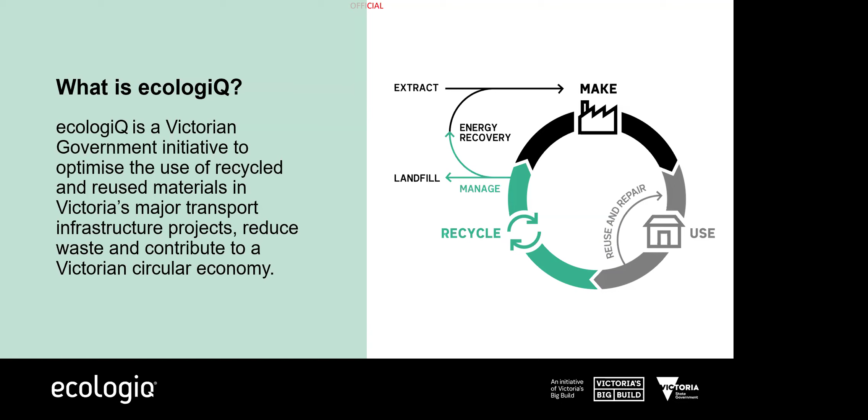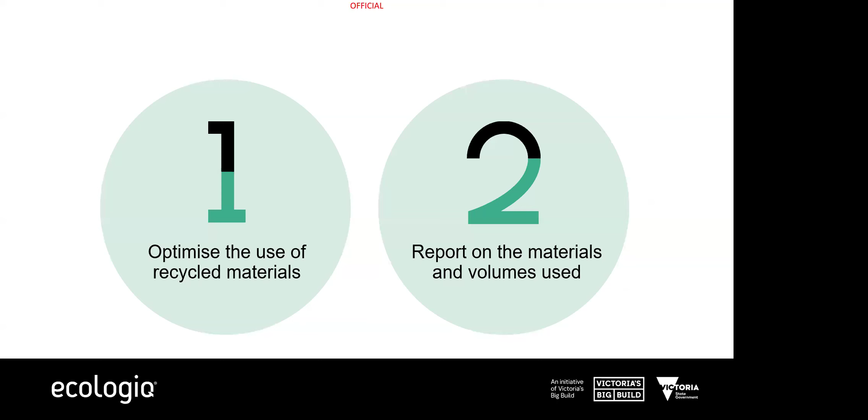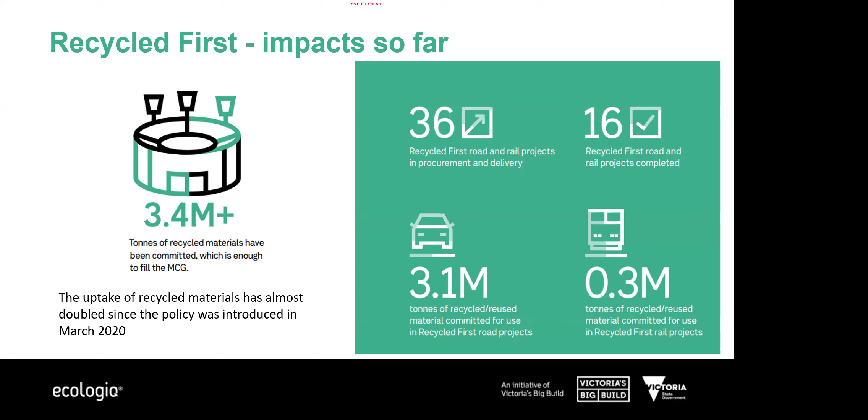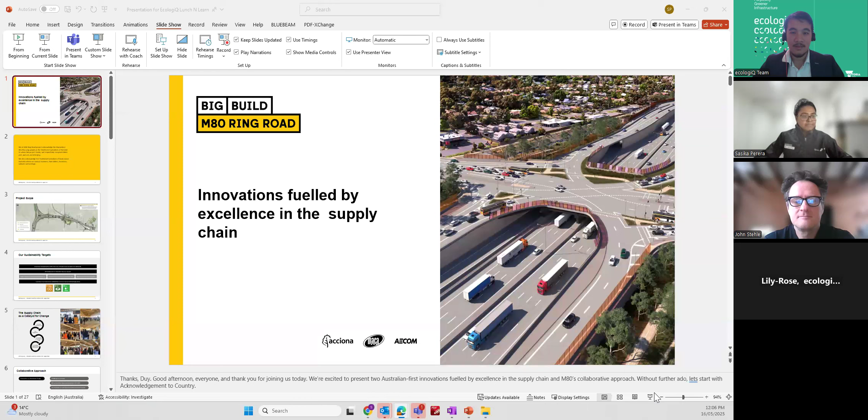I'll start sharing my screen. Hope you all can see my screen. Not yet, not yet. There we go. Can you see the big screen? Yep, it's in presentation mode. We're awesome, good to go.

Great, thank you so much Joey for the introduction, and good afternoon all, welcome. Thanks for joining with us today. We are excited to present two Australian-first innovations, fueled by excellence in the supply chain and the M80's collaborative approach. Without further ado, let's start with the acknowledgement of country. We at M80 Ring Road project acknowledge the Wurundjeri Woi Wurrung people as the traditional custodians of the land on which the project stands, and respectfully recognize elders past, present and emerging. We also acknowledge the traditional custodians of the lands across Australia where we conduct business, and their elders, ancestors, cultures and heritage. The M80 Ring Road Alliance, consisting of Acciona, Maca, and AECOM, is delivering the northern component of the North East Link program.

I would like to share a very brief overview of our project scope. If you want to know more about our project, I would recommend looking at our website.

We will complete the NEL connection between the M80 to the tunnel section up to Richard Avenue. We will add new lanes and introduce 2 new interchanges: one M80 interchange in Greensborough, and another at Grimshaw Street in Watsonia North.

We will deliver 10 kilometers of new and upgraded walking and cycling paths, promoting active transportation. We'll also have 8 new and upgraded bridges, including 2 landscape bridges at Elder Street and Watsonia Road.

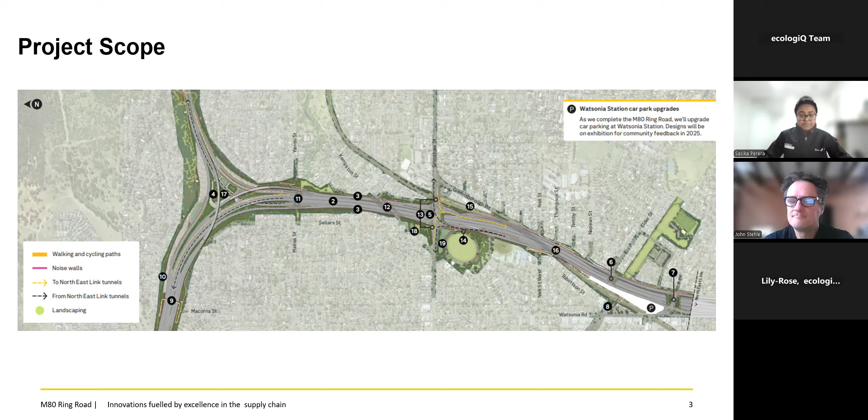At M80, we are all about creating a fundamental shift in how sustainable infrastructure projects are delivered. Our approach centers on 3 key focus areas to reduce the material life cycle impact.

One is design efficiencies and minimizing material usage. The second is maximizing recycled content and promoting the circular economy, as we just explained, and encouraging the use of sustainable certifications such as EPD and SSA to enhance the credibility of the products we are using.

The 2 products we're actually going to talk about today, Robovoid void formers used in retaining walls and GFRP bridge decks, are actively aligning with the United Nations Sustainable Development Goals, such as responsible consumption and production.

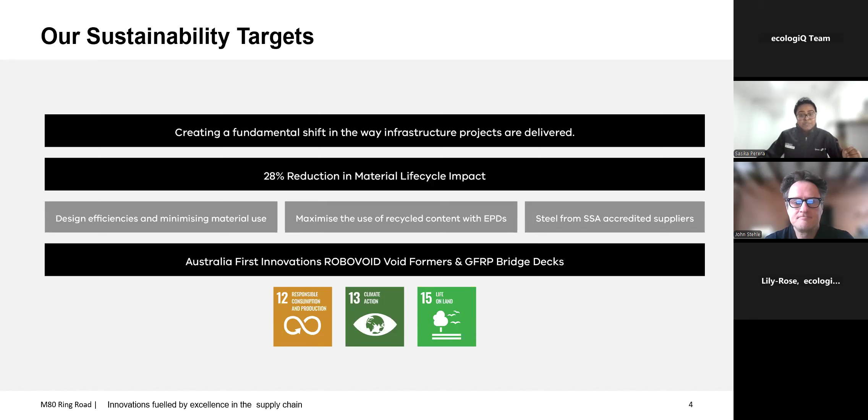So let's move towards what has actually helped us achieve these amazing outcomes: the supply chain. It's a very quick rundown of the process we've used that helped us incorporate these sustainability initiatives into our design.

Early on, we recognized the supply chain as a key catalyst for change in delivering sustainable infrastructure. So we spent a lot of time proactively communicating with the supply chain during the pre-bid, bid, and design phases, using opportunities like ICN events, ecologiQ supply showcases, and other industry forums to communicate our requirements to a wider network of suppliers.

In the photos here, you can see our team at a supply showcase organized by us, where our team was able to directly communicate with the supply chain to harness excellence in the supply chain.

This helped us have early engagement with our supply network, which was crucial for sustainability integration in design, to avoid design changes later in the project and optimize any sustainable solutions which could be incorporated into the design at that point.

Also, we had a strong focus on integrating sustainability into procurement, because our procurement team is the face of the project, directly engaging with our supply chain.

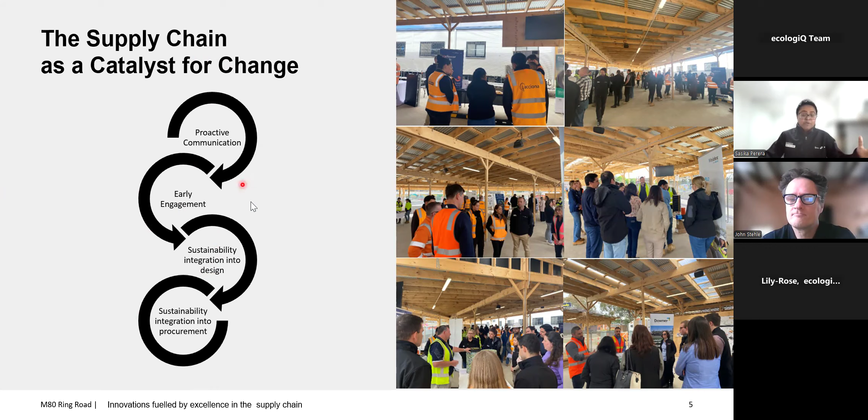All this process, the quick rundown I've given, has been fueled by a collaborative approach. I would like to give a huge shout out to our engineering, design, and procurement teams for championing this collaborative approach and delivering a greater outcome for the project.

So where possible, instead of going for standard prescriptive tenders, we have gone for non-prescriptive tenders, widely known as a performance-based tender approach, which gave us the opportunity to trial new products and processes in our project.

We always requested our supply chain to challenge our process and bring innovative ideas and products to the table. Our engineering team, which is deeply aligned with our sustainability requirements, has been constantly working with the supply chain to trial innovative products and provide guidance throughout the approval process.

Suppliers really got the benefit of working with a tier one company who is passionate and willing to collaborate. So instead of the standard or BAU engineering design approach, our engineering team actually took an eco engineering approach, working with suppliers to deliver great outcomes for the project.

We also acknowledge and recognize suppliers who have gone above and beyond, through various platforms. This is a great opportunity to highlight Robovoid, who has provided us with an innovative solution for our retaining walls.

So Robovoid, which is made of 100% Victorian recycled plastic. I would like to request Dr. John Stella to talk about the Robovoid.

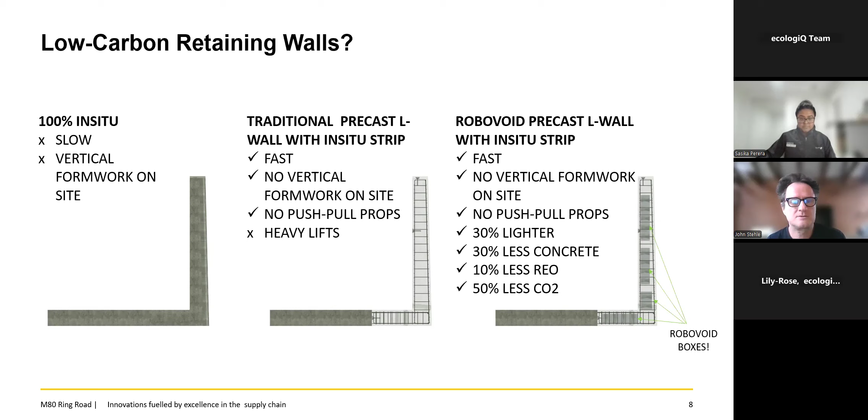So just to explain the Robovoid product, it's a 100% recycled plastic void former system, which is a bit like a kit of Lego, which clicks together and it creates boxes or void formers that go into concrete. We have a range of sizes of void former, and we can create voids from 50 millimeter up to 300 millimeter when they're joined together. And the width is currently 200 millimeters, and they click together side by side and you can create any size void former you want. So maybe move onto the next one.

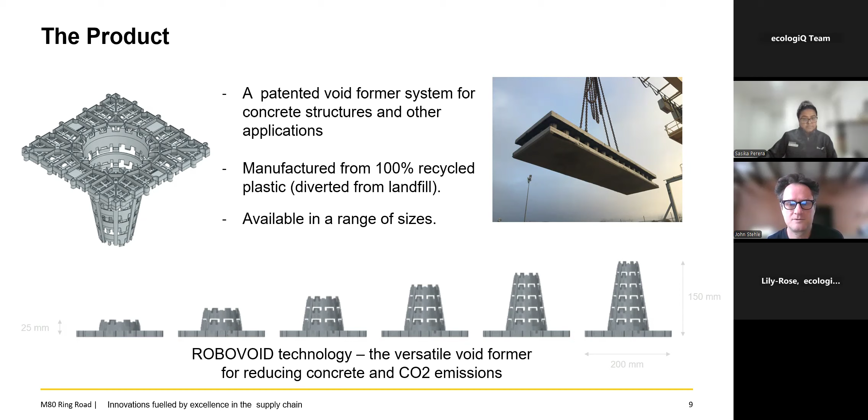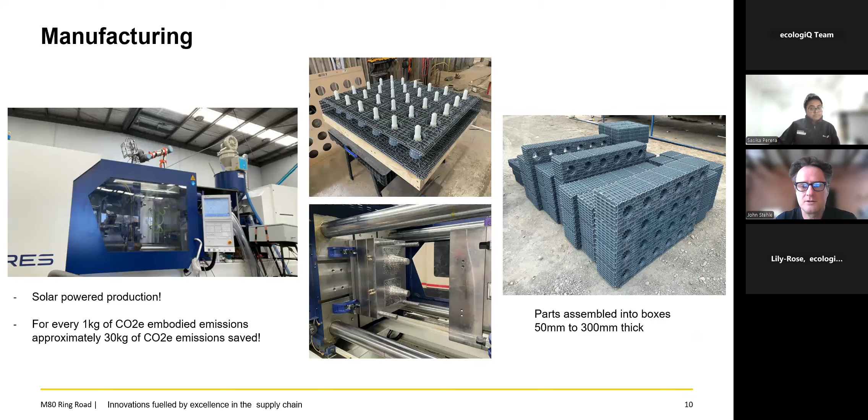So as I said, the concrete typically reduces by 30%. CO2 emissions substantially reduce, and there's logistics savings, fewer deliveries, lighter lifting, and less weight on a supporting structure.

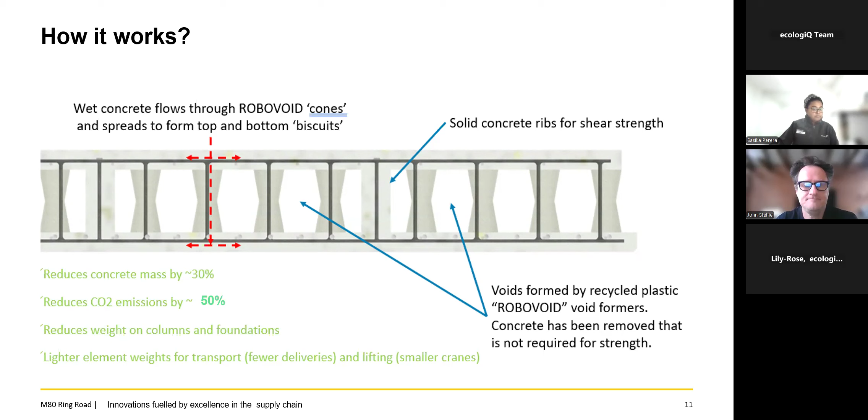Not so relevant for the retaining wall structure, but just more generally, this shows the versatility of the system and what else it can achieve. So strong connections, very little work on site, or most of the work's off site, so you get a very fast build process. You can move on to the next one.

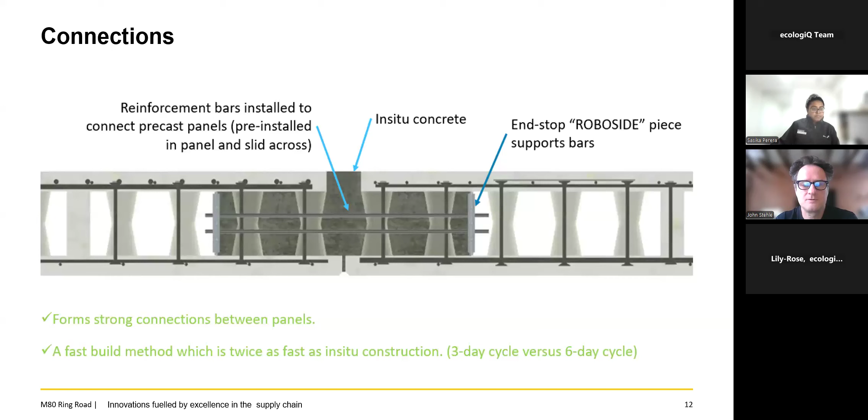So in the Northeast Link project, we've been heavily involved in developing the system or the application there, and we've looked at a wide range of retaining wall heights, some up to I think over 6 meters, and some as low as about 2 meters in height. So as part of that process, we do a lot of detailed engineering analysis. If you want to move on to the next step, Sasika.

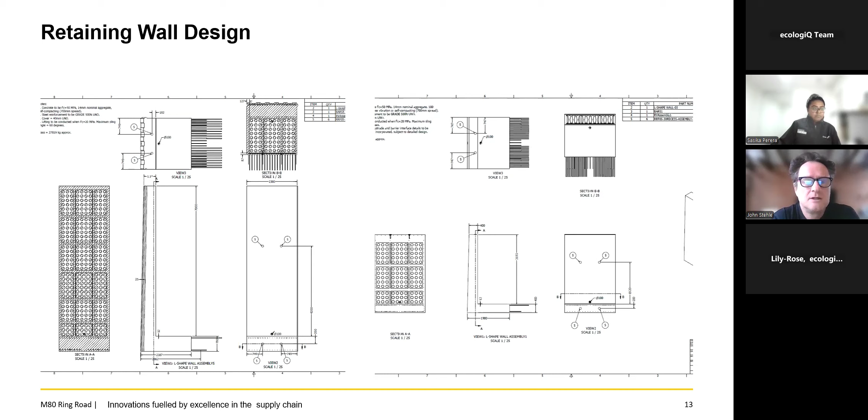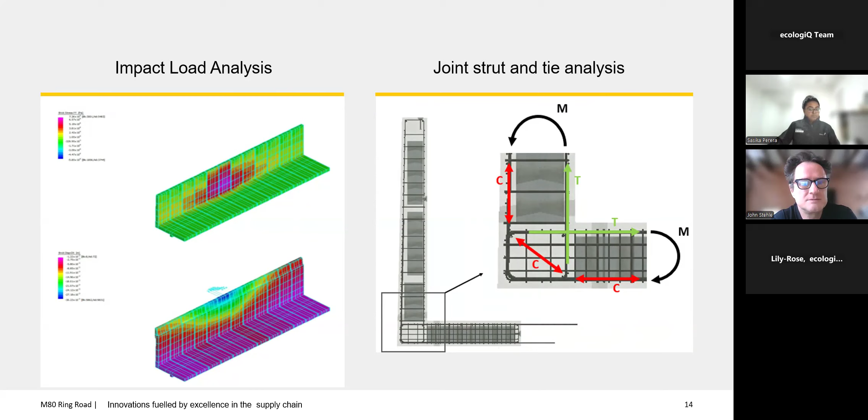Excellent. Yep. And analysing the retaining walls to demonstrate the performance requirements can be met. And so we have to get quite heavily involved in the details, because with any new product, there's a lot of scrutiny, and we really need to demonstrate the adequacy of performance in all aspects. So the left is a finite element analysis, looking at the impact loads, and on the right, just looking at the joints using strut and tie methods. There's a few examples of the analysis. Going to move on. Yep.

And so we've looked at a wide range of heights of retaining wall, and typically we find that the mass reductions are greater for the taller walls. If the wall's only 1 meter high, it's probably not worth putting the void formers in. In fact, they don't actually fit in because the wall's too thin. But for taller, thick walls, we can actually fit in bigger void formers and save nearly up to 40% of the concrete.

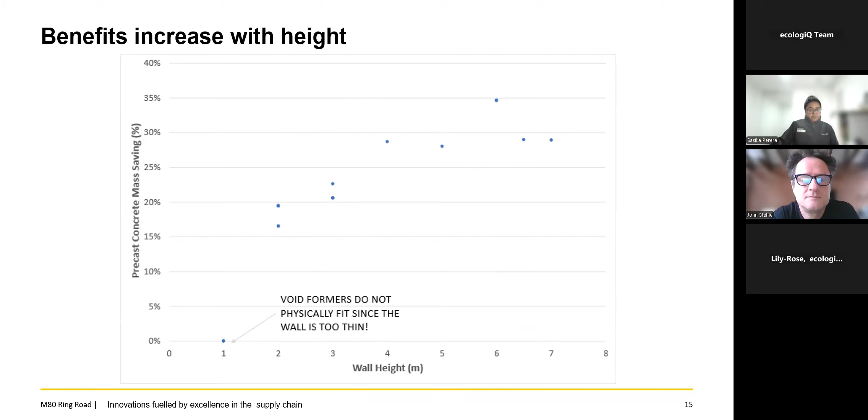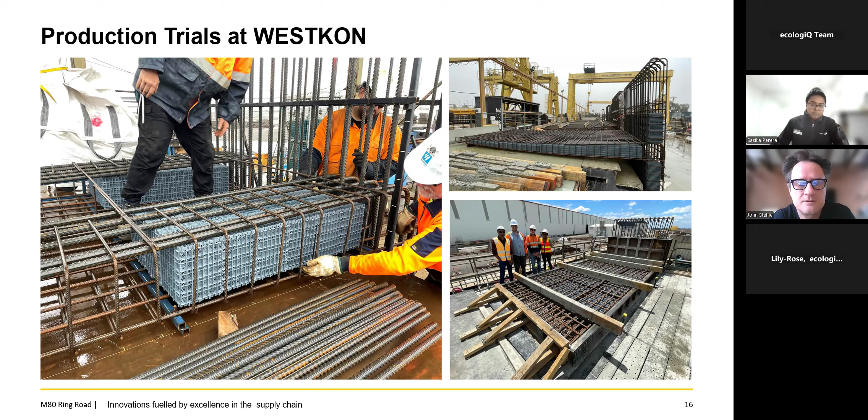So as part of the engagement process, we worked closely with WESTKON, and they kindly offered to conduct some production trials at their facility in Melton. And so we just wanted to make sure that the production manufacturing process would go smoothly. So some good learning there around the reinforcement detailing and the assembly sequence, and that's been incorporated into our design process going forward.

And a key part of the production trial was ensuring that we could get good consolidation of the concrete. So for this one, we used 180 slump concrete with 30% cement replacement and a vibrated mold, and excellent compaction was achieved there. And you can see some of the units that were produced, and they look a lot like all the other units that were made without the void formers, so you'd never know the difference. And Sasika and her colleagues were there to witness the trial, and just to make sure it was all going well.

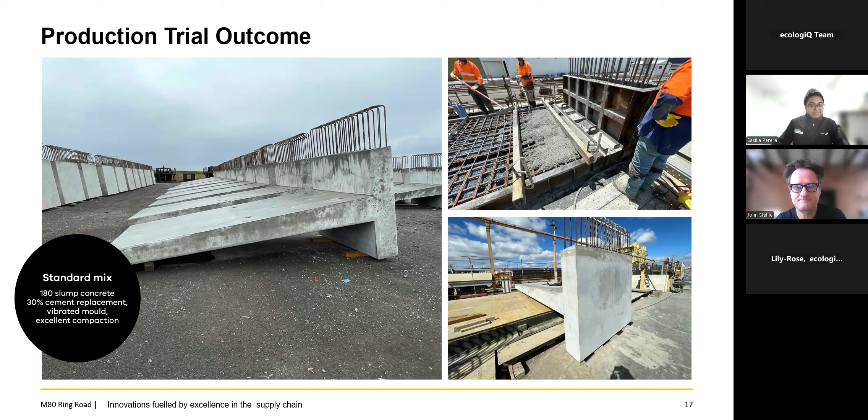So apart from void form retaining walls, it's a very versatile system. So you can use it in ground slabs, suspended slabs, even facades. So we've got some other projects coming up soon as well, where it'll be used in those applications, and we'll talk about them in the future. So thanks, Sasika. I'll hand it back to you.

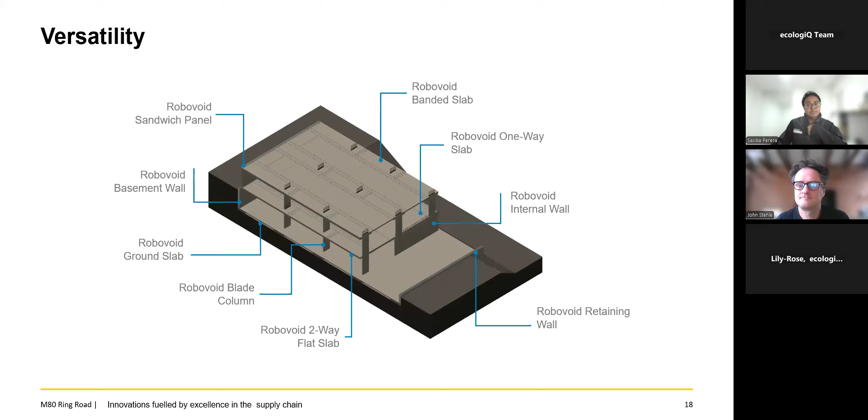Awesome. Thank you so much, John. This initiative has been really a learning curve for us, and the collaborative approach and the technical knowledge which has been given by Robovoid and John was extremely important and crucial for the success of this trial. And we still haven't installed this particular product on site. We are hoping to get this installation going from November this year. So we probably will be able to provide more information on the success of the actual constructability of the product after that first installation.

So let's move into the next part of this presentation, which is the glass fiber reinforced polymer composite bridge decks made with 100% recycled plastic PET foam core. And this has been designed and manufactured by SIS Sustainable Infrastructure System using their patent technology from their mother company in the Netherlands, InfraCore. Please note that the final stage of obtaining DTP approval for the use of this product in our project is still pending. And I would like to acknowledge and celebrate our engineering managers, Tim Lennon and Paddy Reid, for their effort in driving this extremely challenging initiative.

Also, I would like to acknowledge the collaboration of SIS, which was instrumental in driving this initiative forward. So we have Nick Bolton from SIS attending this session today. So if you have any questions, please feel free to put it into the chat. We'll get those answered through Nick and myself. So let's move in.

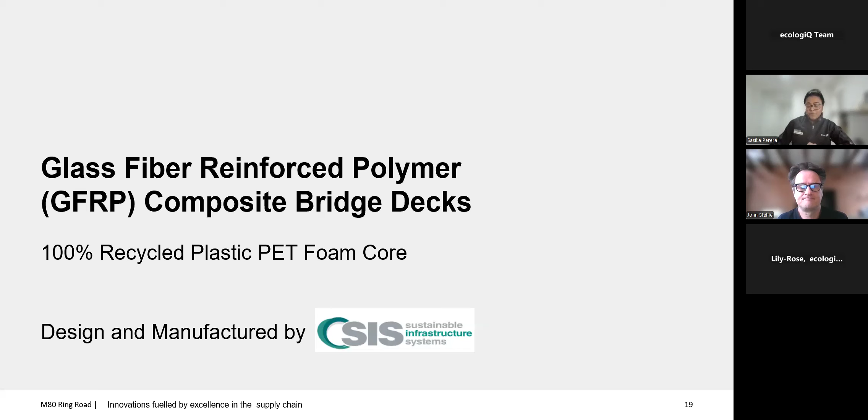So what are the benefits we can realize if we use the GFRP bridge deck? So it will provide the 100-year design life, which is important. The maintenance and inspection regime is comparable to the conventional decks, so nothing extra is required. Less whole of life costing due to the reduced capital and demolition cost and comparable maintenance cost. And using 100% recycled Australian soft plastic for the core, which is 80% of the deck, which is something we really wanted to be realized, and then 100% end of life recyclability.

Another important thing to notice of this bridge deck is it is 10 times lighter weight compared to the concrete deck and provides high strength, resulting in the reduction in the size of the structural components. So we can actually optimize the substructure and the rest of the superstructure, like the arches, because it is lightweight. And also it reduces the fuel consumption during the transportation and lifting equipment, because the weight is extremely low, and it can be manufactured off-site and reduces the on-site installation exposure, which is helpful in terms of the traffic disruptions and other construction programming constraints.

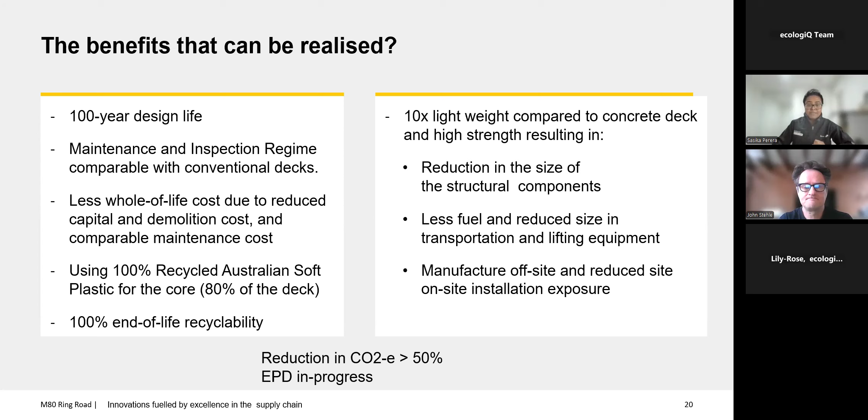The product. What is the product? So the product actually is the deck itself. I'm pretty sure that most of you have heard of the GFRP rebar. It is the bar, but this is actually a full deck made of the GFRP. So it has the wearing surface, which you can see on top, and then you have the GFRP structural flanges and webs, which are in a Z shape. So it's the red line in the middle photographs. And then the PET foam core, which is made of 100% recycled plastic.

So what is GFRP? GFRP is the composite material made of polymer matrix reinforced with glass fiber. So as I mentioned, SIS is using the InfraCore technology to manufacture this in Australia. The actual GFRP Z flanges have been made using the glass fiber sheets and locally sourced resin. And then the PET foam is made from 100% recycled Australian soft plastic.

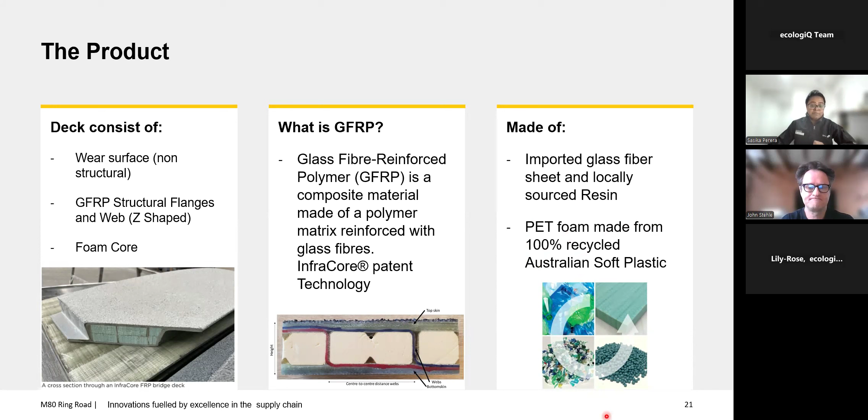So I would like to talk about the wearing surface and what benefits it can add to the urban design aspects of your project. It can have various colors and patterns. You can have various types of surfaces and high quality texture finishes, and it actually provides quite a lot of urban design flexibility.

For our project, what we have proposed is the multi-layer deck coating system. So we'll have a non-structural coating providing the UV resistance, and we will achieve a P5 slip rating in accordance with the Australian standard, and also this wearing surface will provide an easily maintainable surface during the life of the structure, which is very important.

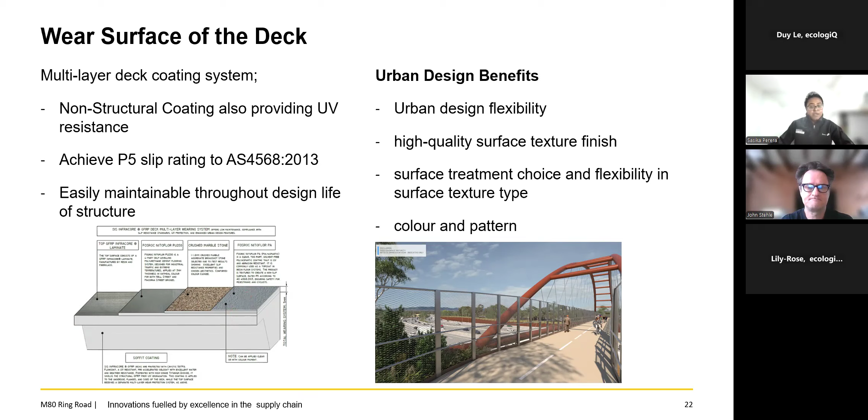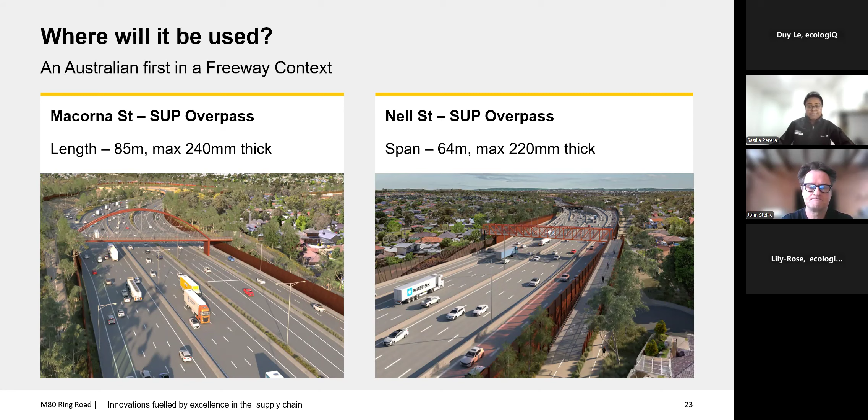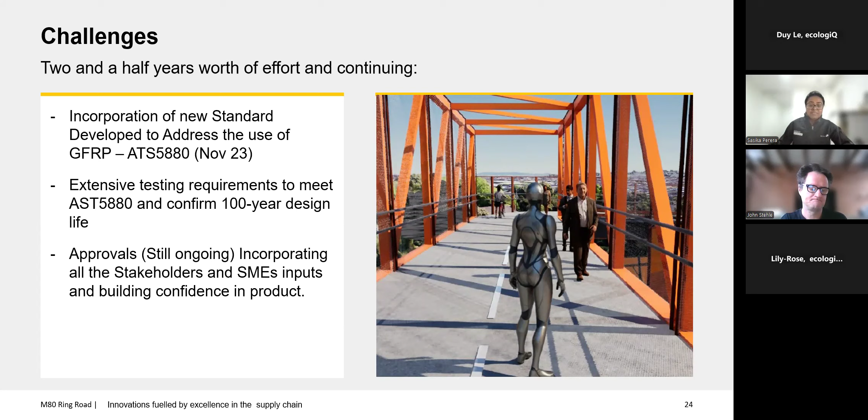The learnings, the collaboration, as I mentioned, has been extremely crucial. Open book approach with M80 engineering team and with SIS. That approach has been extremely instrumental, where SIS can get the guidance and support from our M80 engineering team to actually go ahead and proceed with the necessary requirements made by the SMEs. Early identification and engagement with the suppliers, as I mentioned, and then trying to get the necessary approval through the collaboration with the stakeholders and SMEs.

So another important learning was when we first met SIS, they were importing the core, the PET foam core, from overseas using, again, recycled plastic, but it is actually overseas waste. However, within these 2.5 years, SIS was able to develop a process where they can actually use Australian soft plastic to manufacture that PET foam for the core, which is 80% of the bridge deck. And they have the conversation going with Woolworths and REDcycle, so that they can actually use that particular product to manufacture the PET foam using Australian soft plastic.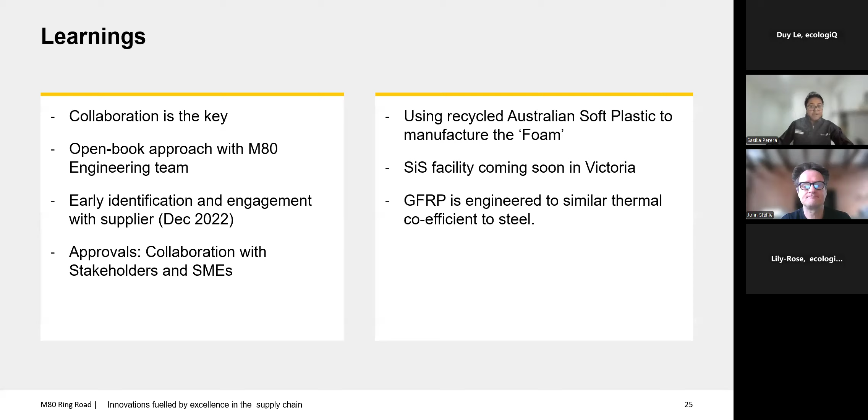I would like to hear from you guys what you would like to hear from us next. Because as a part of M80 Ring Road Completion, we have actually implemented various initiatives such as ultra-low warm mix asphalts, calcined clay field trial using excavated spoil in situ and precast, which is coming soon, low carbon concrete solutions for structural elements, up to 75% SCM, and then low carbon stormwater drainage solutions and temporary cardboard hoarding with acoustic properties. So please feel free to scan the QR code and provide your vote so that we know what you would like to hear from us next. Over to you, Duy.

Thank you, Sasika, and thank you, John. So I hope you're getting plenty of data there, because I'd love to find out more about all of those elements, and for our future Lunch and Learn sessions, I think it'd be great to revisit some of these topics. So my key takeaway from that is the importance of collaboration up front. I think what we're seeing here with the M80 project is that engagement with the supply chain, looking at what's possible, having your procurement processes not being prescriptive, but really being performance-based, allows for that innovation, which is something we're keen to see as well.

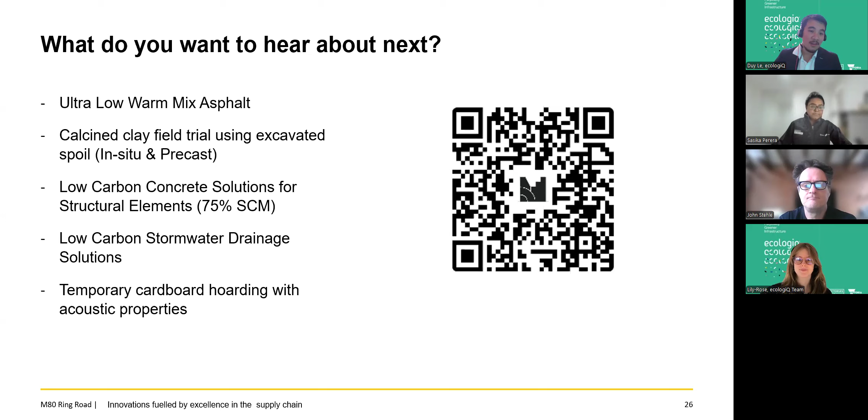So just going straight into the Q&A from an anonymous attendee. This might be a question for you, John, perhaps, or if you know the answer to this: are there any other recyclers that recycle GFRP in Victoria or elsewhere in Australia? Sorry, say that again. Are there any recyclers that recycle GFRP in Victoria or elsewhere in Australia? So as far as we are aware, SiS will take the material back, and we have Nick from SiS if you want to answer that question. Yeah, I'll see if Nick is on the line. Is this Nick Wotton? Yes. Nick, if you're there, you're welcome to take the mic.

Can everyone hear me? Yep. Excellent. So our product is fully recyclable. We're actually in talks, and have been for about a year and a half, with GE in relation to the processing of their turbine blades. So we've developed a process here in Australia for the recycling of GFRP. It's essentially a big plas compactor, and the material is cut into smaller sections. We then shred it. Some of that we mix with an agglomerate, and then we put it back through the process. So absolutely, we can process GFRP here in Australia.

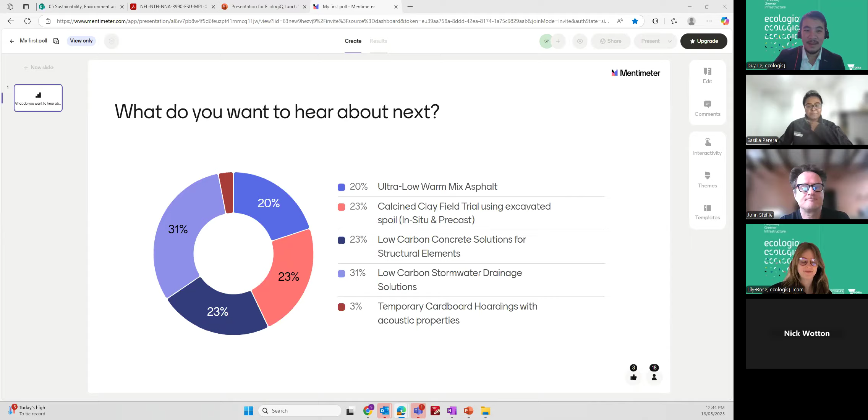And Duy, I would like to share the QR code outcome quickly. So this is what we got. We actually have the high voting for the low carbon stormwater drainage solution. So probably that will be our next topic of discussion. Thanks all for voting for that. Fantastic. Thank you, Sasika. Yeah, that's great. And I think drainage is always an area that on our projects has such a big impact, and I think people are always keen to know more.